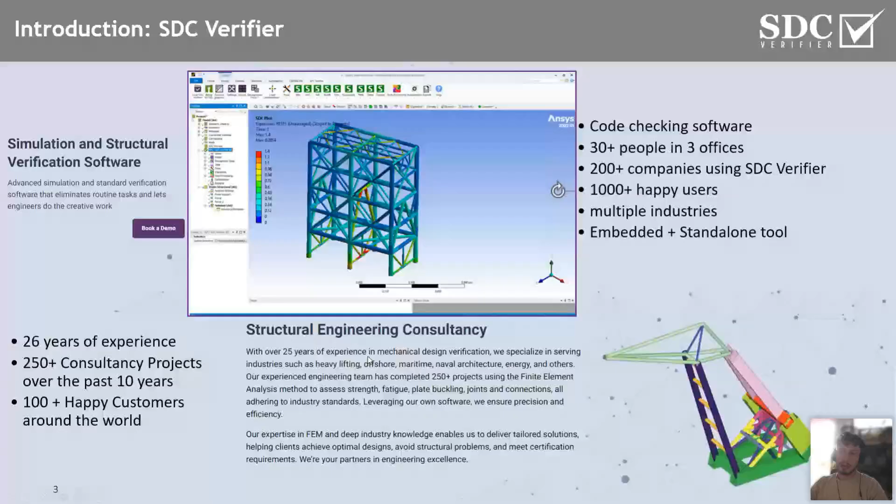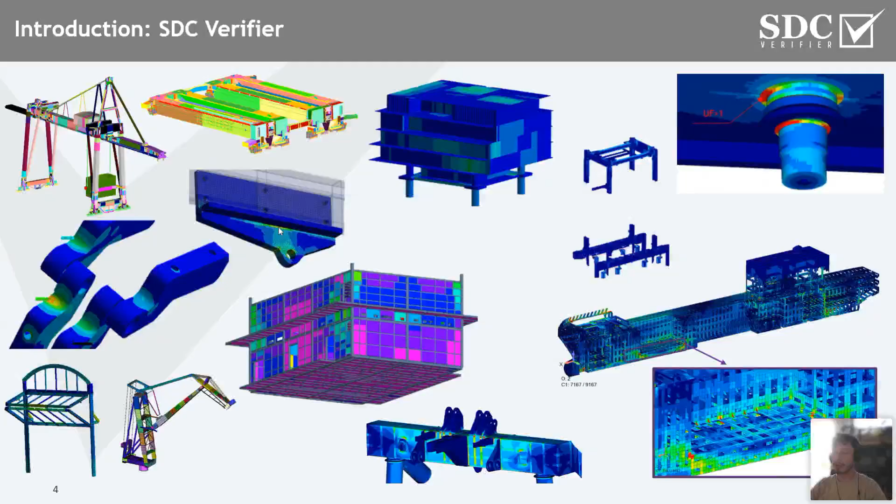Here on the screen you can see different structures for which you can utilize SDC Verifier. As you can see, many lifting crane structures, shipbuilding, some smaller structures where fatigue assessment has to be analyzed, and different types of offshore structures, topside, mud mats, from global analysis through very small details where you have to comply with standards. You have to ensure that your part will meet the certification requirements, and you can use SDC for this.

From our experience and the trends we see at the moment during our work with different companies from different countries, we can see that FEA tools are getting more and more popular within the industry. At the moment, basically, there is no way to ensure your structure meets the standards, to calculate structural strength, fatigue, weld strength, and plate buckling without FEA tools. We always have to meet very short deadlines and very strict rules where results have to be accurate. So at the moment, the only way to do that is to use FEA tools, such as Ansys with SDC.

We can see that a lot of companies try to automate all the code checking. It's not like it used to be, with spreadsheets and manual work, where every time you have to repeat the process, or regenerate reports, doing the same work each time. So we can see that a lot of companies want to reduce this time through automation. If you have very repetitive processes or very similar structures where you can repeat those processes easily, automate them - that's the way to aim at the moment to fit deadlines and ensure your structure is always checked the same way, so there is no room for error.

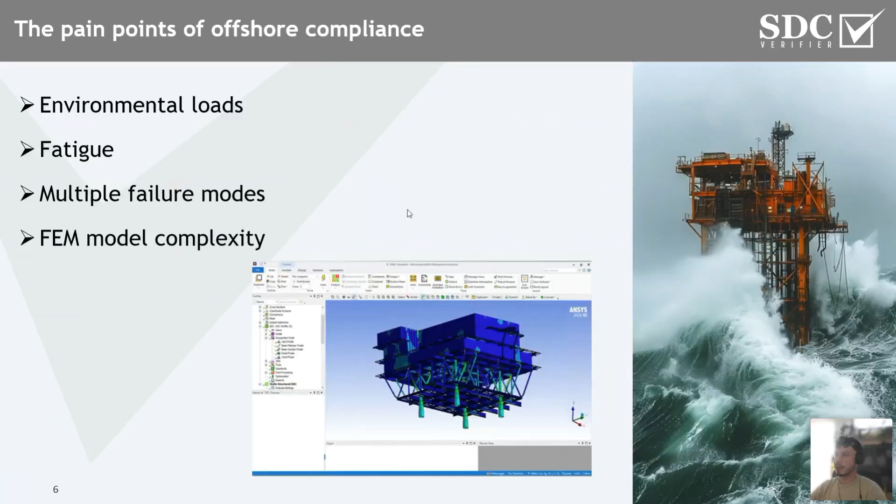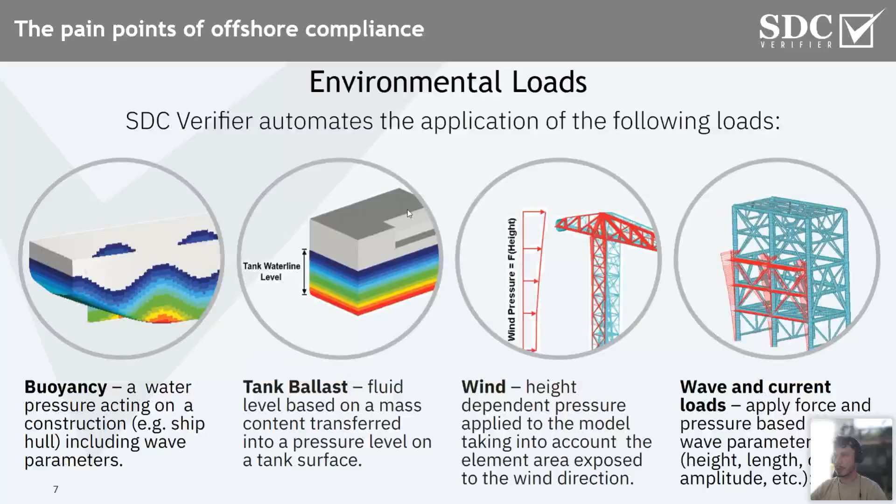First of all, all the complex loading conditions should be taken into account, as I said - different conditions like wind, weight, wave load, tank ballast, buoyancy load, and so on. We have to make sure we can apply them directly through the model, for example with the use of different tools, because doing it by hand can be very tedious and time-consuming work.

Also, as I mentioned before, fatigue and buckling. Fatigue is damage of the structure caused by repetitive cyclic loading - different accelerations, cyclic wave load, and so on. This causes stress differences, delta stress, in our elements, which results in the development of cracks. A crack initiates, and with every further cycle of loading, the crack can grow further. That may not even be noticed at first by an engineer or maintenance crew, but over time it can cause a lot of issues, as those cracks often initiate in places where we don't have visual access. So the only way to estimate where cracks can occur, for inspection purposes, is actually FEA analysis. From the results we can see where cracks may occur, in which part and element of the model, and then schedule inspections accordingly.

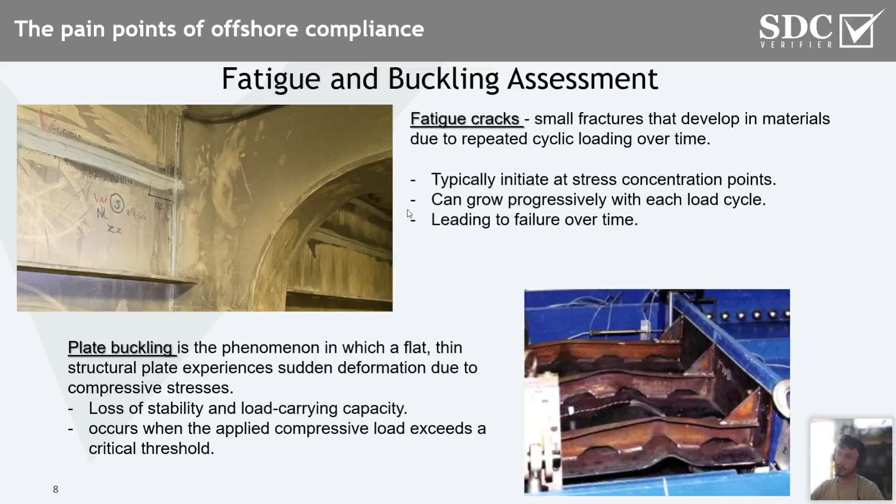We also have limitations of manual verification. What engineers used to do before, and some companies still do, is manual verification with spreadsheets, where there's really high risk of human error. The engineer has to read the results, copy, paste, and manage all those results. There might be thousands or millions of different outputs, different stress results, displacements, and so on. So it's almost impossible to manage all of this without error. Sometimes you update the model and have to re-update all the outputs for the calculation, and there might be cases where you forgot to add something. That's very risky for huge structures. It's also time consuming and really hard to handle multiple combinations.

Another thing is it's also hard to represent the results. We can show numbers, but how do you represent nice plots and nice pictures for your customer, or even for yourself, for internal usage?

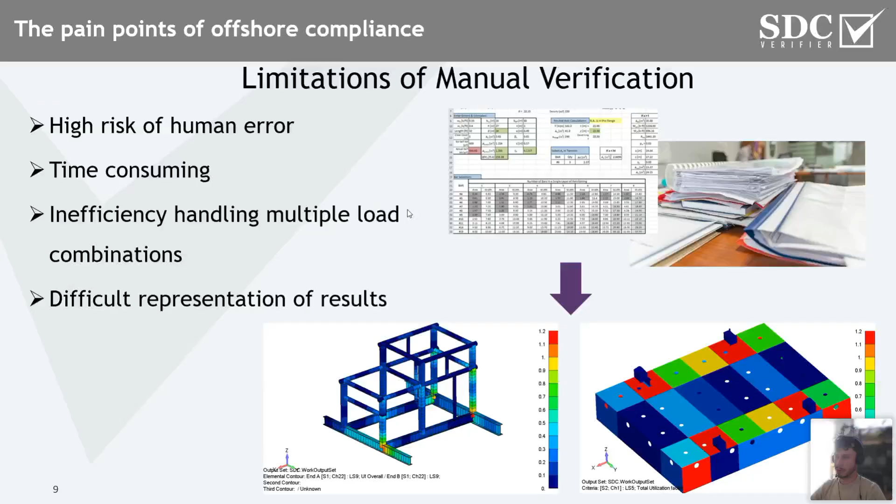Last thing, of course, is compliance to multiple standards. For example, offshore buckling standards like DNV, API standards for tubular members and joints. These are the popular codes to which a lot of structures should be calculated. So the question is how to do it efficiently.

Here we have SDC, which is software developed for engineers, by engineers, to help everyone make their life easier. As you can see on the screen, SDC works as a plugin for Ansys, FEMAP, and Simcenter 3D. Here we will focus on Ansys, but we also have a standalone separate version with our own graphical interface.

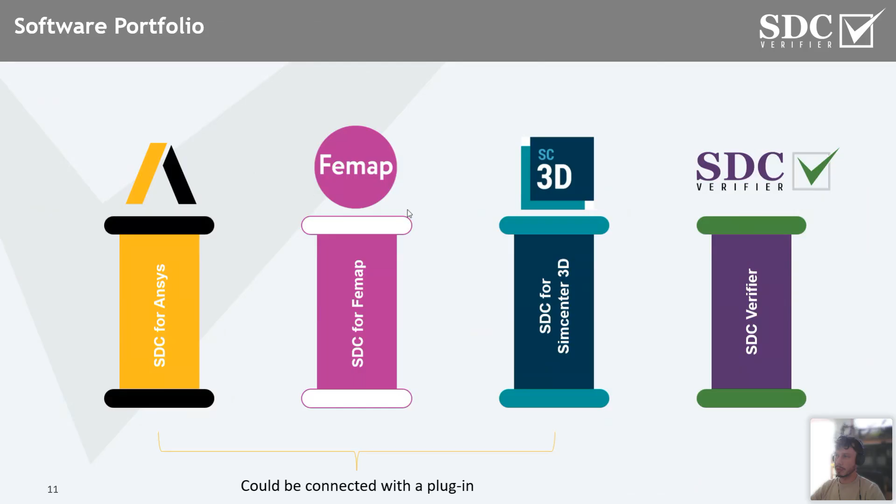First of all, you have to prepare your model. The workflow with SDC for Ansys is that you first create your model in Ansys, apply all the boundary conditions, constraints and loads, and then from there you connect SDC and do all those processes one by one, automating the workflow to improve efficiency and reduce time.

After the model is prepared, the engineer can perform load combinations according to different standards. Every standard has a table with different safety factors and partial reduction factors we have to take into account. Sometimes due to many different loading conditions and directions, the number of combinations may grow to hundreds or even thousands. With SDC, you can manage them easily.

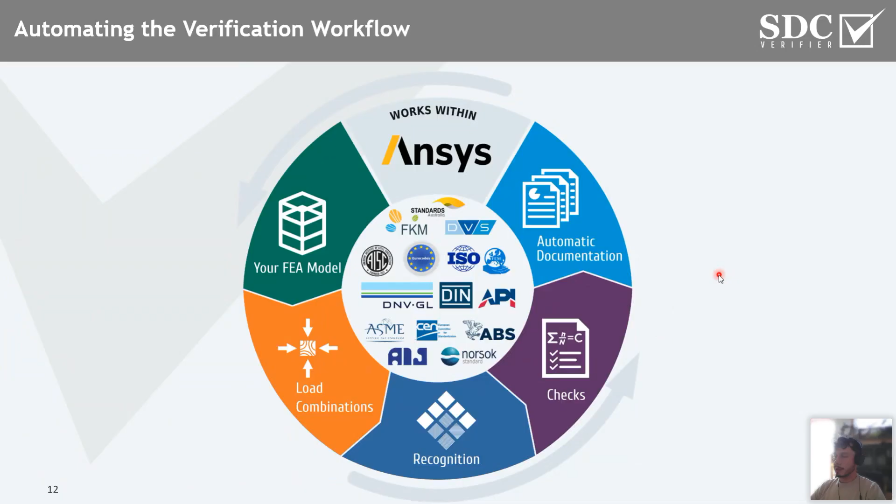Let's go through it in detail. First of all, as I said, preparation of the model—preparation of all the loading conditions and boundary conditions.

With SDC, we have a tool that allows you to create wind pressure with different wind profiles over height and different drag coefficients on your structure automatically. The wind load is exported directly to your Ansys model.

Same with wave load—you can take into account different coefficients for different members and plates, and apply the load directly to your model, again automatically. All those loads will be structuralized with SDC, and you can also generate nice tables explaining all the load steps, how the load was applied, and at which place—again, all with one click.

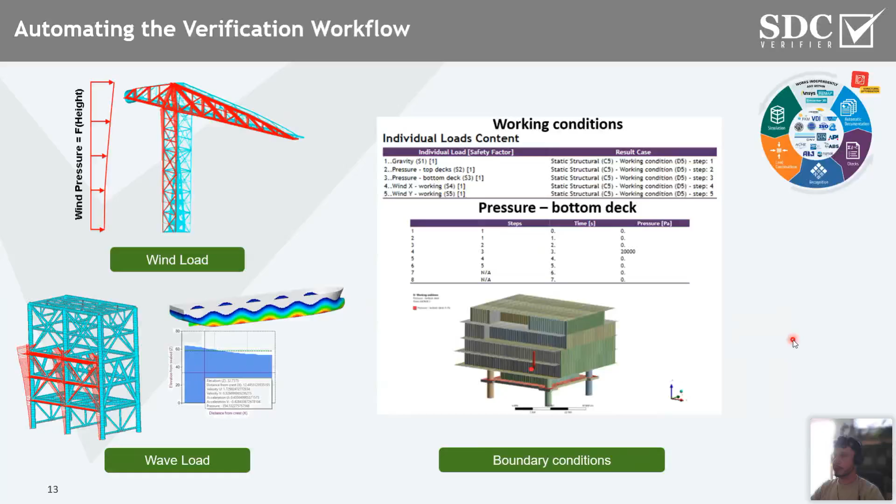The next thing, I have also a short video just to show you how to make the wind load profile. As you can see, there is this simple window.

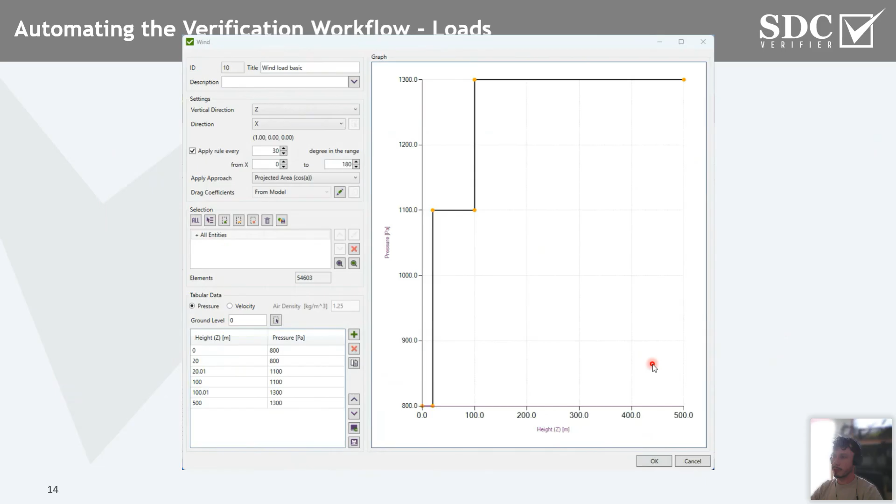Here you can specify the vertical direction of your model, and the direction of the wind applied. On the bottom, you have the possibility to create a selection of the model, so you don't have to apply it for the full model. You can only choose a selection, for example above the water. Choose the wind profile from your database, create your own one, and save it. With use of that, wind will be applied to the model.

The next thing are load combinations, as I mentioned. In SDC, all the loads are structured in a way that you will see separate individual loads, so all the loads without any factors, which can be combined afterwards with linear combination with different factors from standards.

Then we have load sets, which are linear combinations, and also load groups, which are envelopes of the result. A load group can be created out of load sets or out of individual loads, so you can choose which loading conditions should be taken into account for certain standards, or for example for fatigue checks.

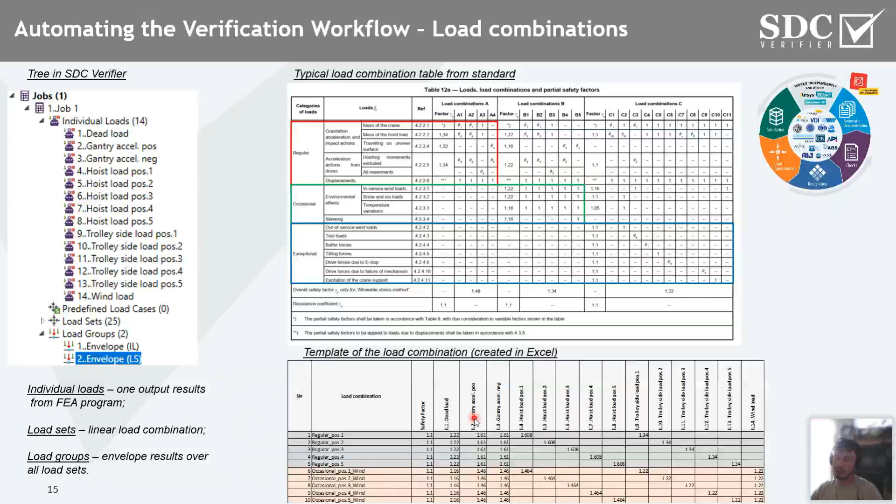What you can see here is a typical table taken from a standard. It can vary, of course, from different standards - different factors, different loading conditions, but the idea is the same. The very basic way to do it, how most engineers did it before, is to create it in Excel and copy paste this table into SDC. That's one thing. Or you can also use predefined load cases, which is a way to do it automatically.

Here you can see a short video of how those automatic combinations can be created. The engineer can select the standard, then the next step is to choose a category for each load - for example gravity, dead load, some vertical forces, live loads, and so on. Of course, you can choose multiple conditions at once.

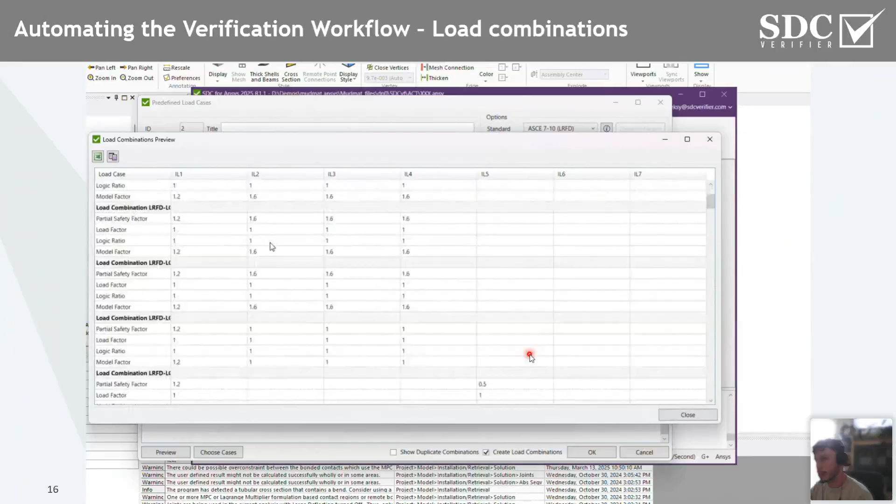You also have the possibility to choose different positions of the load. For example, if you have a wind load from different directions and you don't want to combine them into one load set, you will see that the software automatically takes all the factors and creates the set of combinations according to the standard which you have chosen. So that's also a quick way to do it.

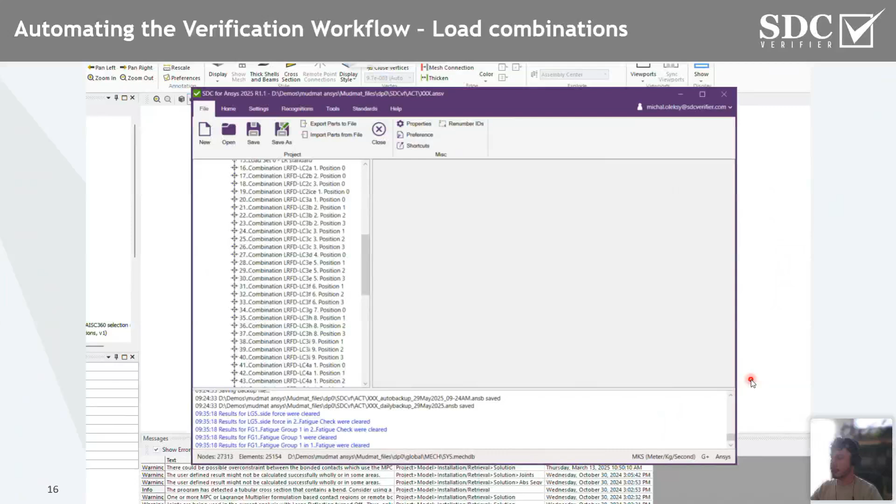Another step is recognition. Here we have different types of recognition. First of all is joint recognition. This one can be performed for one-dimensional elements, and it recognizes all intersections and also reads from the model whether it's a joint in one plane, in a three-dimensional plane, or for example only in one line.

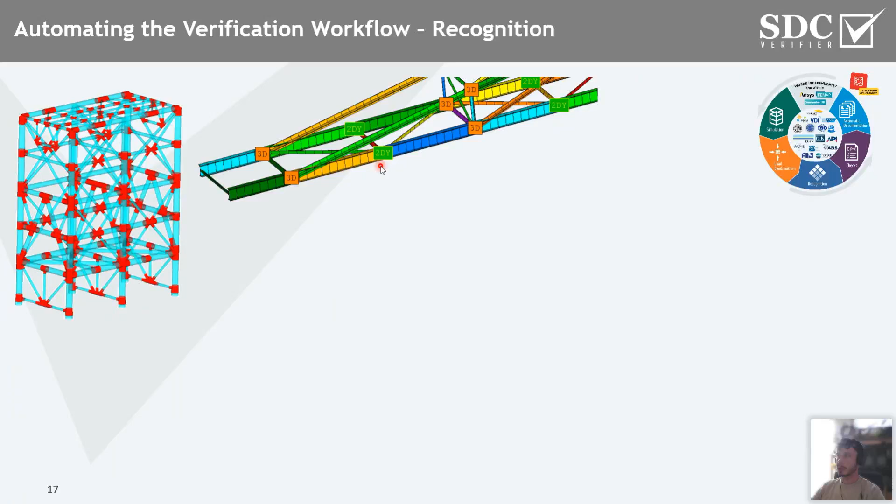Then, if we speak about beam element joints, the next step is to recognize beams. Out of this recognition, the software reads the buckling length for each direction of the beam. For example, in direction Y we have the full length, while in direction Z we will have this length split where we have a joint. That's how SDC works in this case.

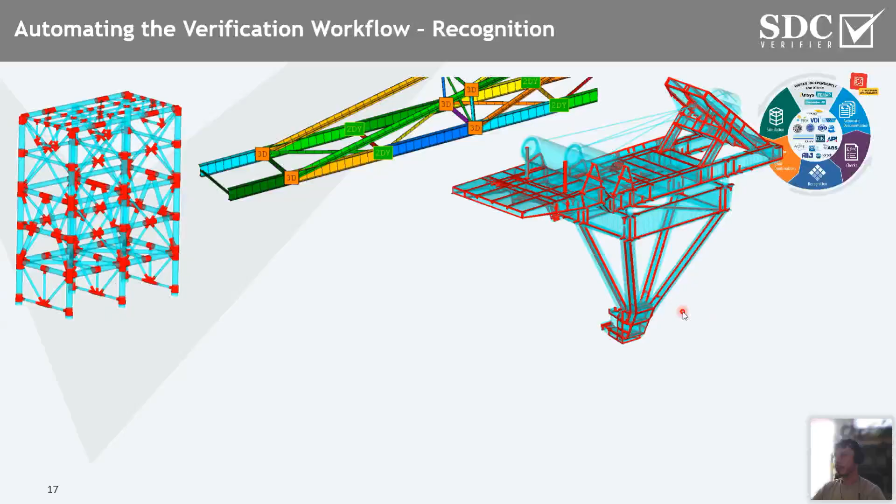Then we have also recognition of welds, which can be used for example for weld strength check and for fatigue checks. Here we can recognize both shell elements welds from the shell model, and also a three-dimensional model.

So with solid mesh, another thing is recognition of stiffeners and of plates. Here we take into account all shell elements. In case of plates, SDC reads the boundary of each plate, reads the intersection between the plates, and also stiffeners, which are modeled with 1D elements. Out of this recognition, we can use dimensions.

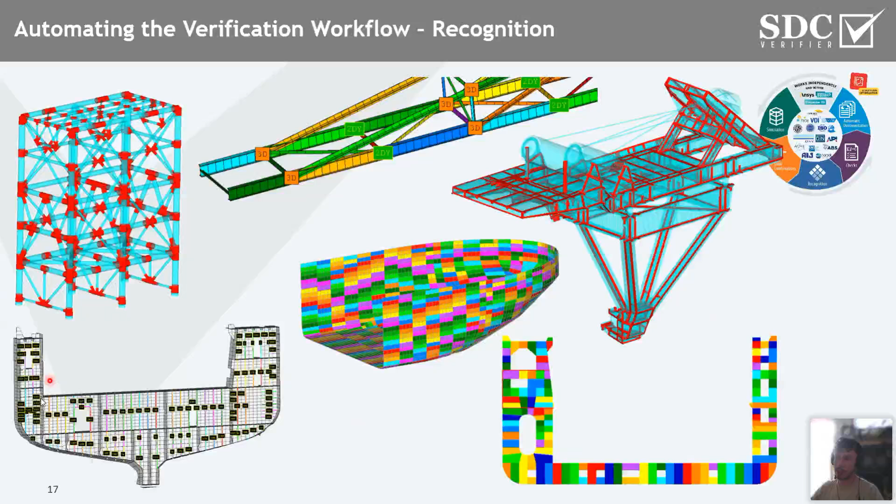SDC will use it automatically. You don't have to do anything except press one button, but that's how it looks like. Here you can also see the recognize stiffeners function, which covers stiffeners modeled with 1D elements.

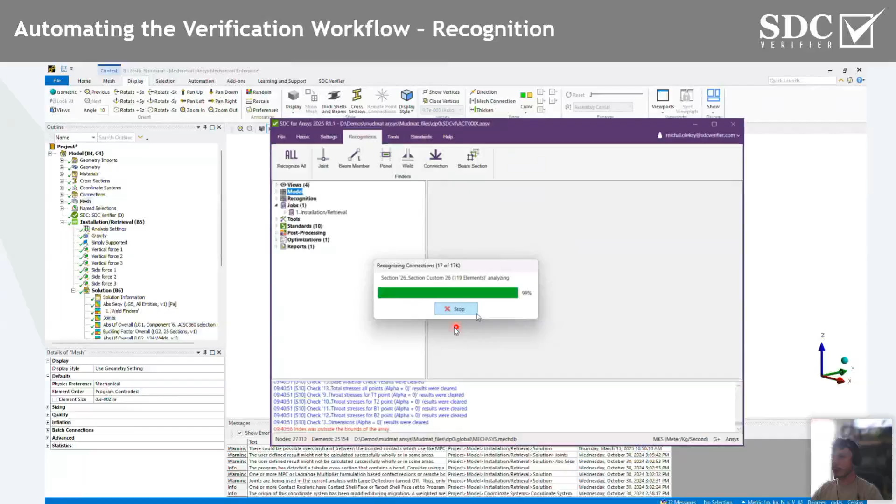Here you can see how to recognize all elements. You can click one button, see the progress and how fast it is, and you will see the window showing how many joints, beams, and plates were recognized. Each recognition will create a table with numbers for every part, and the engineer has the possibility to preview all of them with different kinds of labels, number labels, and different colors directly in Ansys.

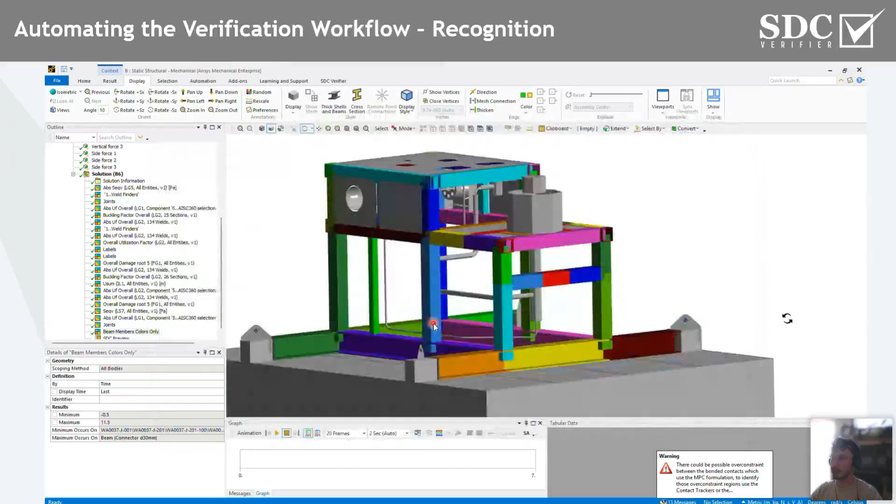That's how you can easily manage all those recognized parts, figure out where you have which member, and then use this logic also for calculation, just to choose the proper selection for the model which you would like to analyze.

Here you can also see panel recognition. We can preview all the plate elements directly in the model. As I said, these elements are recognized out of the shell model.

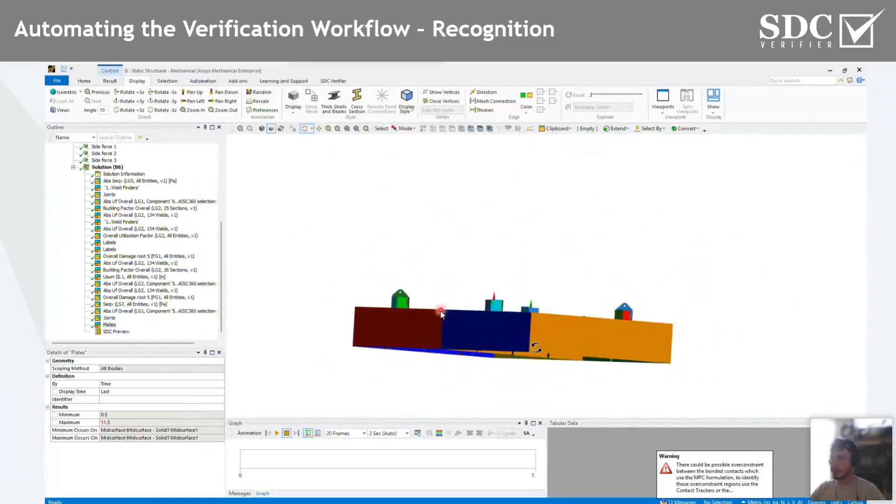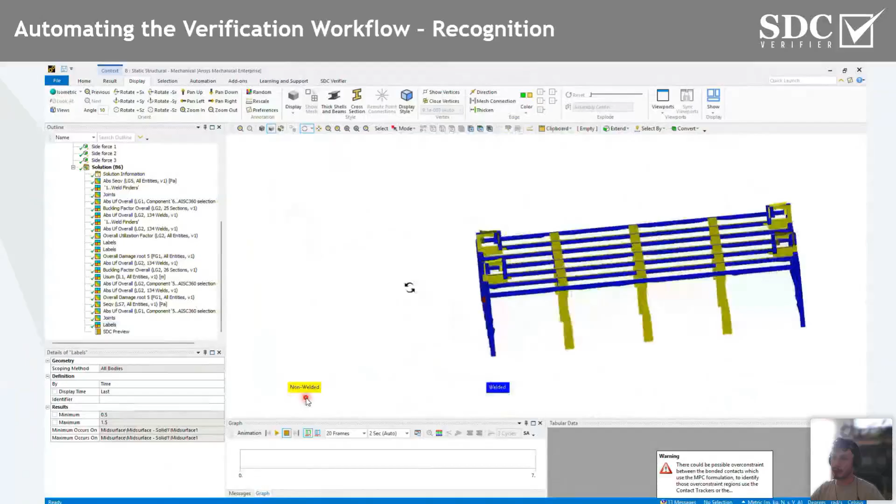The next step would be to show weld recognition. In this case, all welded parts between the shell elements. As you can see, SDC also recognizes which part is welded and which part is non-welded. That's very important, for example, when setting up the SN curves, notch classes, and FAT classes.

Depending on the standard, if we would like to perform fatigue checks, here as a summary you can see all the recognized elements out of the same model. As you can see, this tool is also pretty powerful and makes your life easier and much faster.

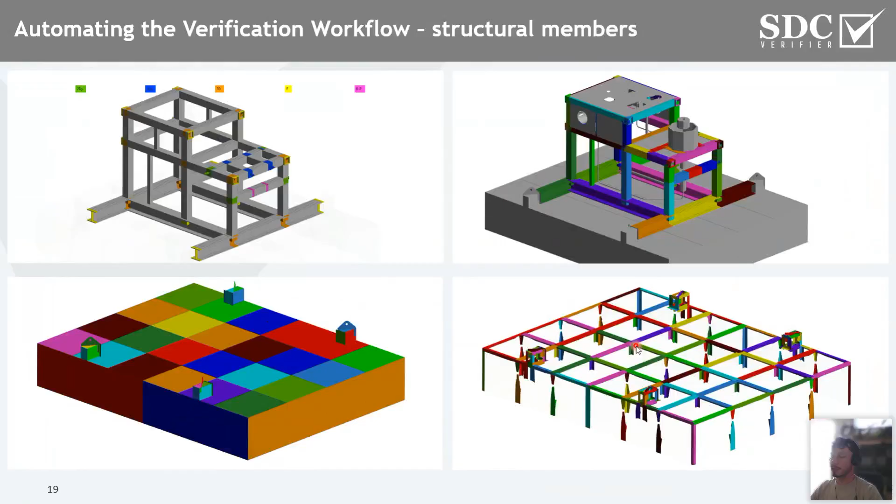If we speak about panel recognition, it's worth mentioning that all the plates are sorted by planes, for example by Z, X, Y, and also custom - these being ones which do not belong to any plane.

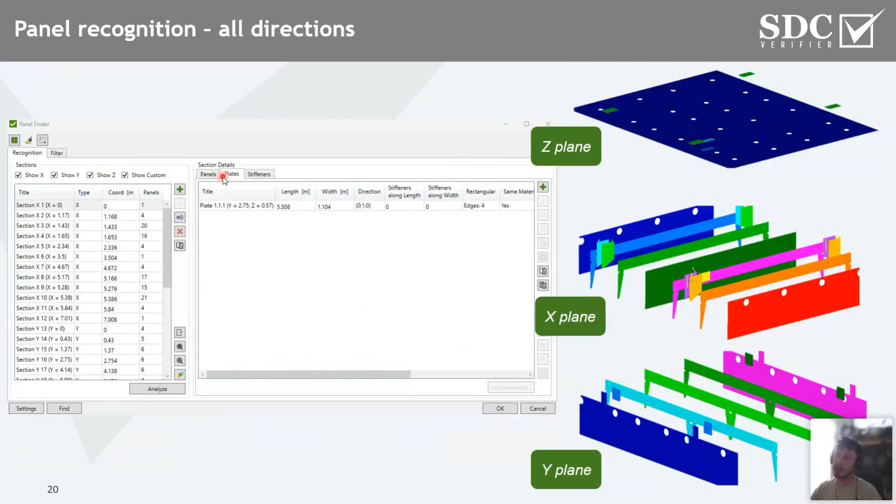In the table, you can manage all the sections. The section is the biggest part, which consists of different panels and plates. The section is then divided into panels at every intersection of panels or plates, and each panel is divided into plates with beam stiffeners.

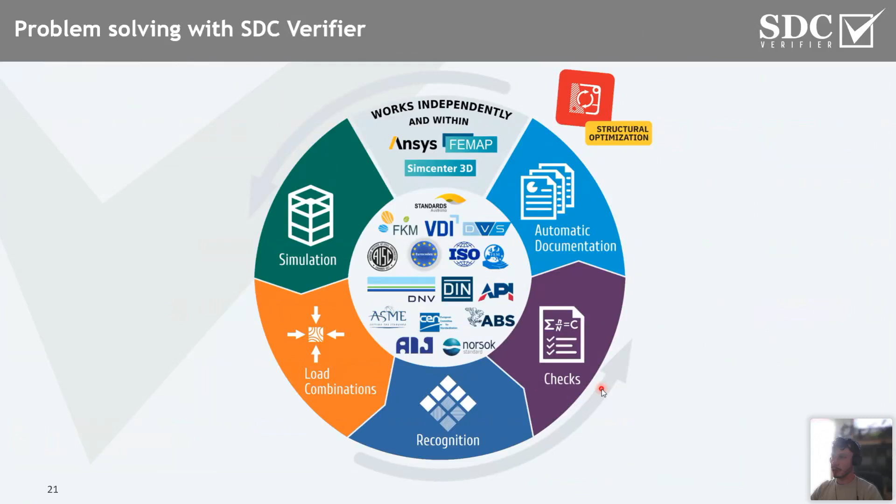The next thing, except recognition, is our checks. In SDC, you have a database of many predefined checks. As you can see on the screen, these are a couple of them. I'm not even sure how many we have at the moment - I think about 50 or 55 different checks with different standards implemented.

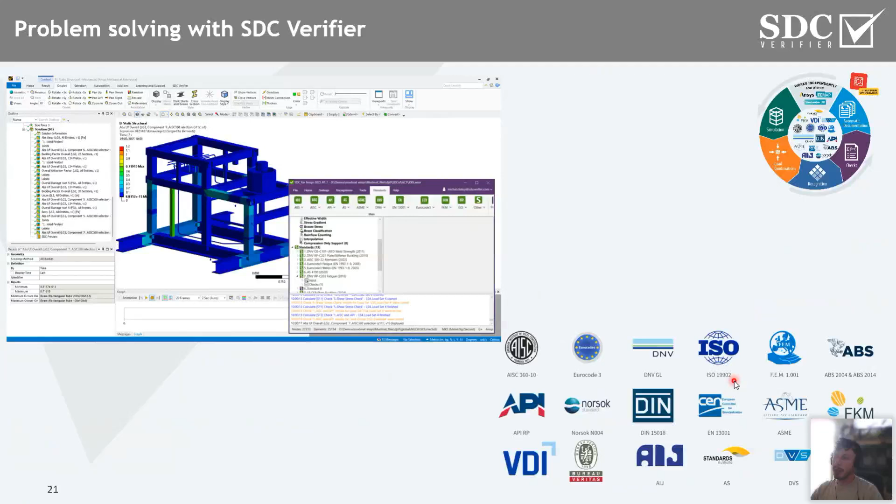That's one way how you can perform them - just select from the database, add it to the project, and then calculate. But there is also another way to do that.

It's worth mentioning that all the checks in SDC are open for the user. So if you wish, if you have some time and would like to learn something new, you can easily add a new check or edit an existing one using simple formulas, using outputs from Ansys - parameters, material data, property data, constants, everything. I know it may look a bit complex at first glance, but in reality it's very easy. If you can use Excel, then you can easily add these formulas in this SDC check creator window.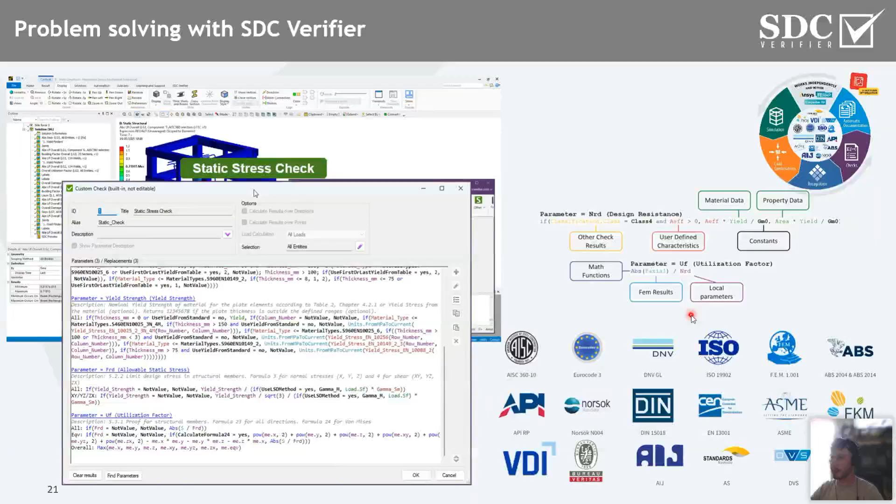Let's now focus on some checks - example for offshore structure. In this case, I would like to focus on plate buckling. Later on we can also discuss fatigue and joint check quickly, just to give you an idea how they work in SDC and how you can make sure that your offshore structure meets the requirements.

For example, if we would like to calculate the plate buckling check according to DNV, when you add it to the project, you will see the window where you can adjust different settings. So it's not like you add the check and just blindly follow what the software told you.

You have the possibility to preview different results, also to adjust some things like thickness factor - for example, if you would like to increase just for calculation your thickness or decrease it to take into account corrosion, that's also possible. You have the possibility to choose different selections for the check and also different methods to read the stresses.

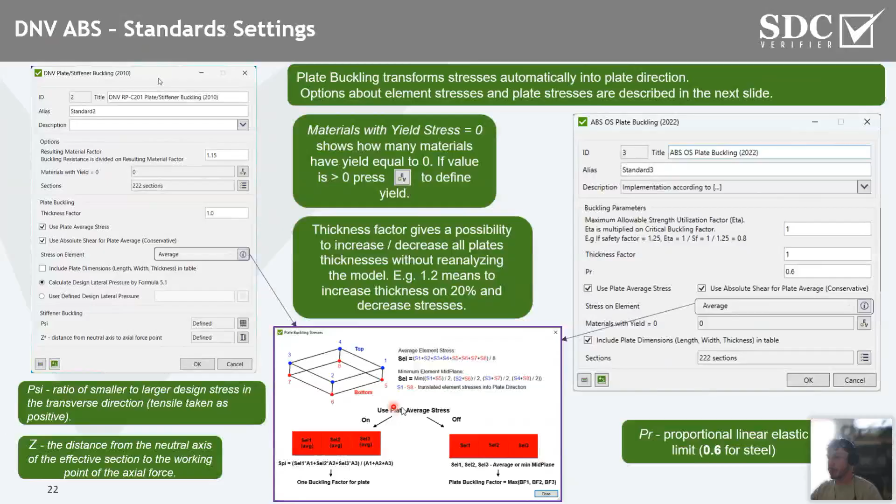The stresses can be shown as average or minimum midplane, for example. It's also a possibility for an engineer to use a different approach. On the left you can see DNV, on the right ABS. In general these checks are very similar - we only have slightly different factors.

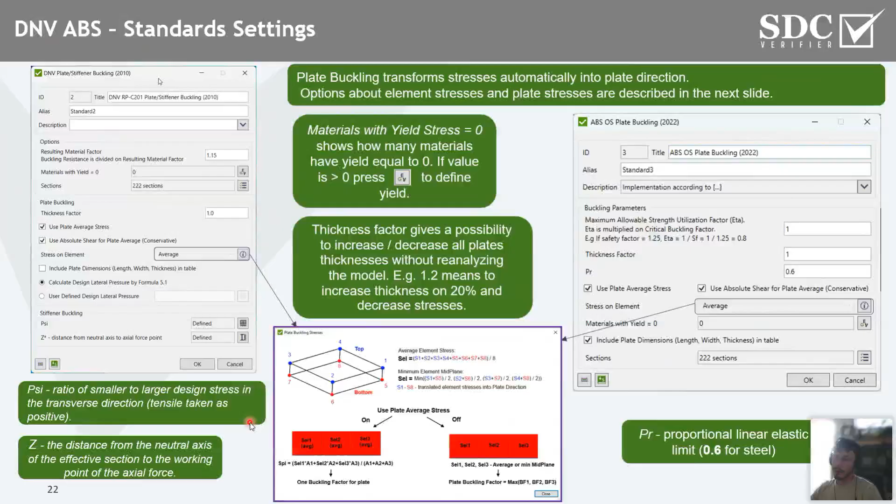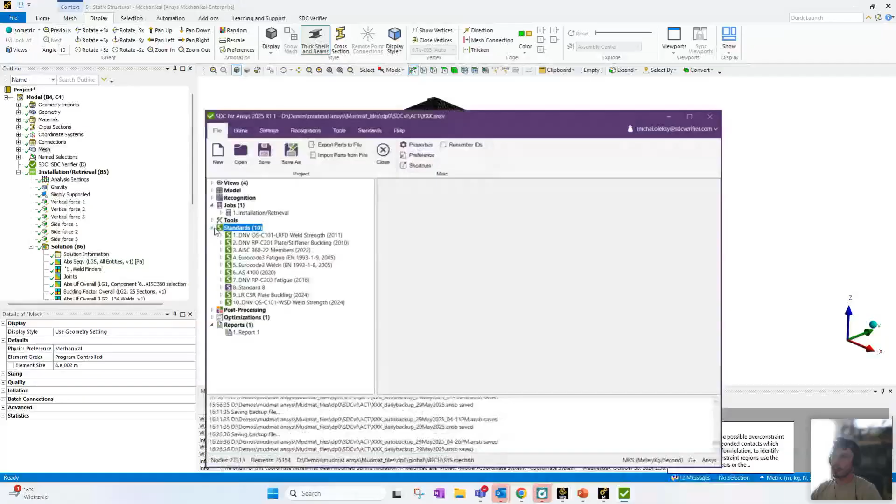Just to give you a rough idea how quickly you can do it with SDC, I will quickly jump to Ansys and show you a live demonstration. We can even see how much time it will take me to recognize and calculate this DNV check, and you can compare it with hand calculation, if any of the engineers still does it.

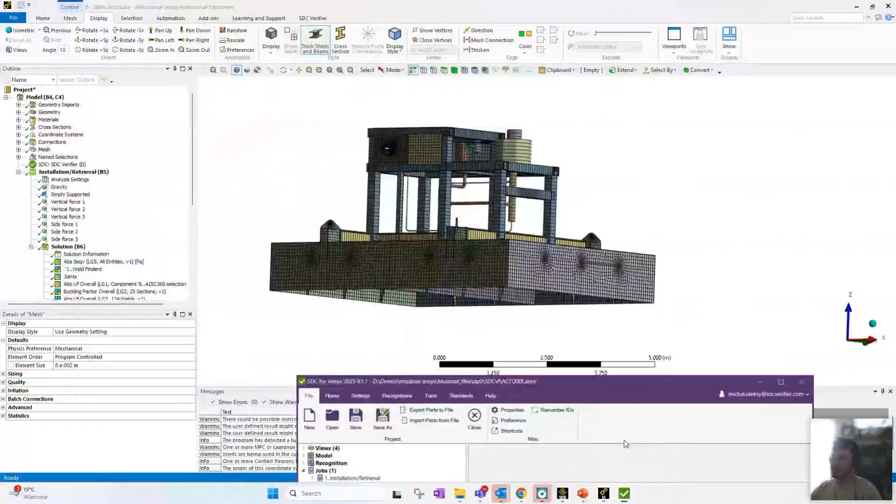First of all, we have our model, same as on the presentation. Then I can go to SDC. First step would be to recognize panels - I can go to the panel finder, click find, remove all the existing sections, and recognize it once again. As you can see, how quick is it?

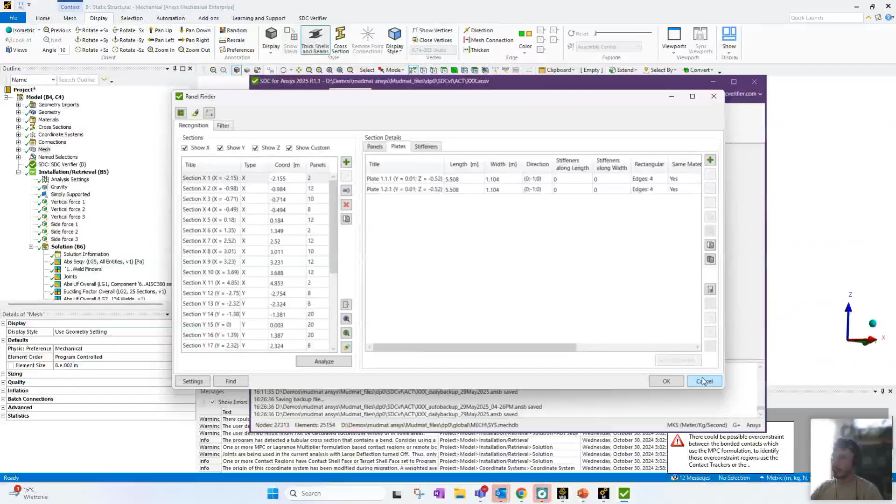This model is not so big, but even for a larger model it should be fairly quick. I approve by OK, and then add the standard which I would like to calculate - let's choose DNV, for example, CG0128 plate buckling.

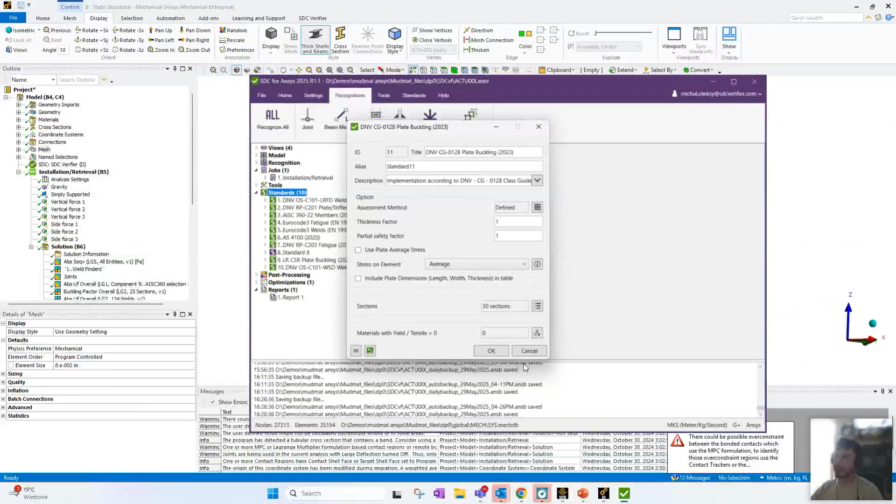Here you can see the same window. If you do it for a second time, you can already predefine all those settings which you usually use. So with one button, you can load them, approve by OK, and you're basically ready to preview results.

So I can quickly create a plot. The only thing you have to do here is choose loading conditions. For example, I would like to see plate buckling results for the envelope of all my load sets, which I created. And here, preview. On the bottom, you will see that SDC started calculation, and it calculates for all load sets, 1, 2, 3, 4.

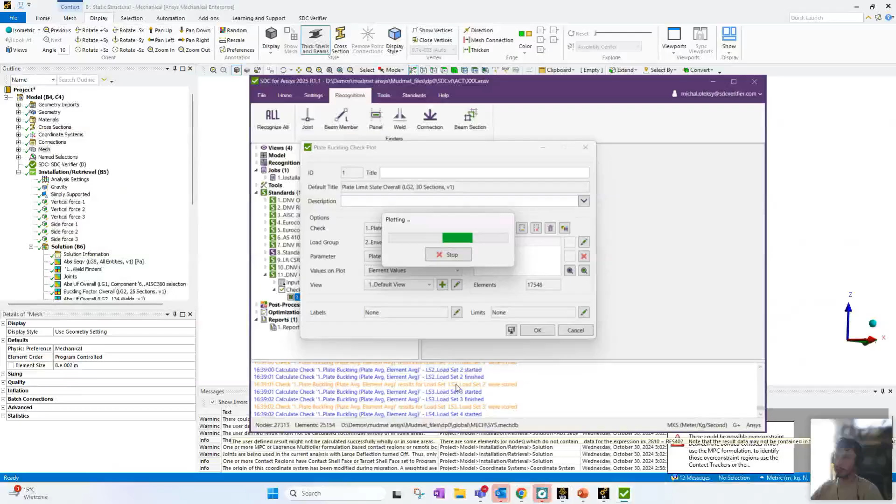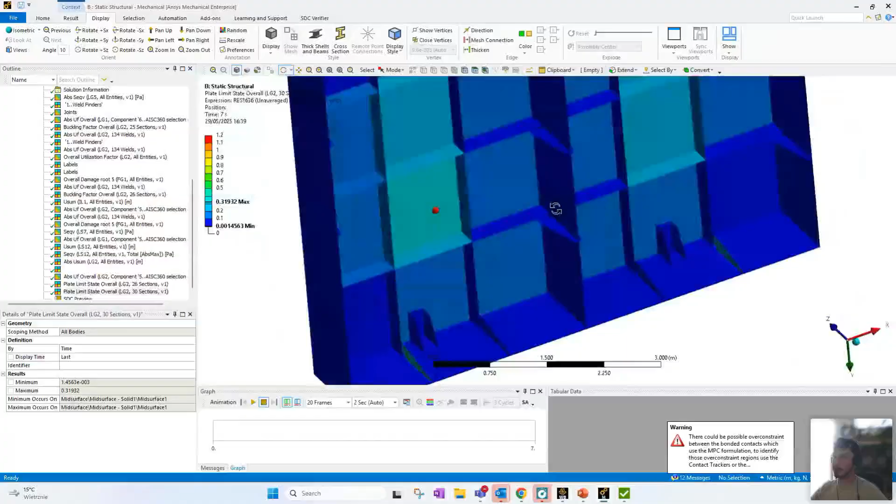Of course, depending on how many load sets you have, it will take longer or shorter. But in my case, it's already done. It took me about 2 minutes to calculate all those plates, probably around 100 plates. For each of them, I already have the utilization factor and all the calculation procedures stored according to DNV.

Also, with one click, I can generate the report and send it to my colleague or even to a Certification Society.

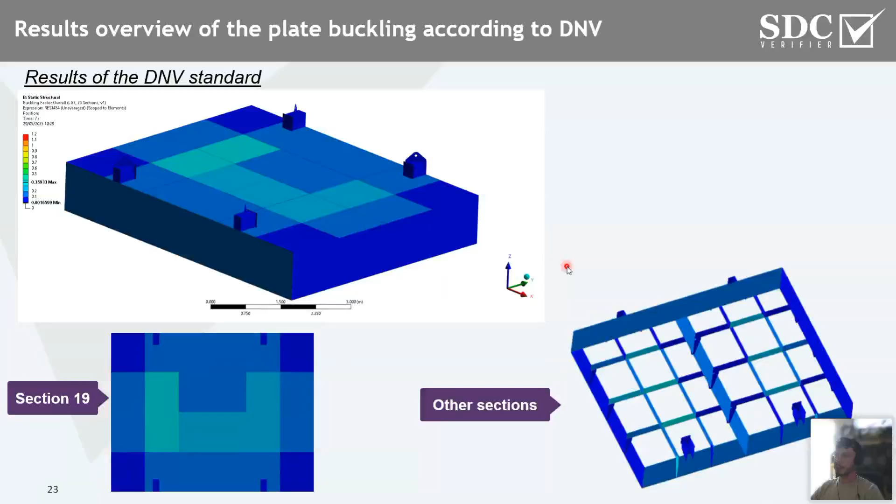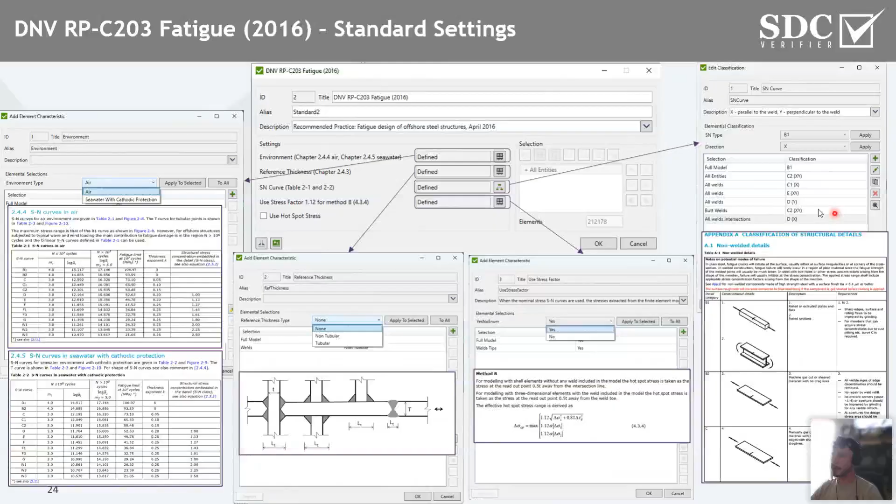If I go to the next slide, you will see that classification for the welds and for non-weld parts may be different. Of course it has to be different for different conditions, different direction of load, different type of welds, and so on. You can find these pictures in different standards, and they result in different classification for our model.

With use of the SDC selector, you can easily recreate that classification directly in SDC. As you can see, for full model I have a higher class, and then for welds in X direction - X direction will always be parallel to the weld. That's how SDC automatically transfers all the stresses in weld direction. X direction is always parallel to the weld, Y is always perpendicular, and so on. Thanks to that, you can easily set it up according to standard.

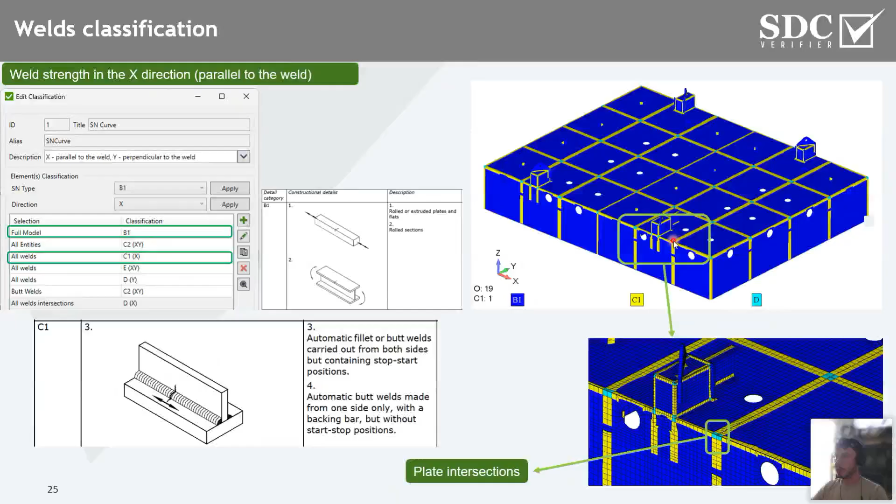For example, if we speak about X direction, you can see that here I set up C1 for welds, B1 for all the model, and also for all intersections, which are also automatically recognized with use of the weld finder. You can see from this plot that it was automatically assigned to all the elements, taking into account all those intersections. Same situation would be for Y direction.

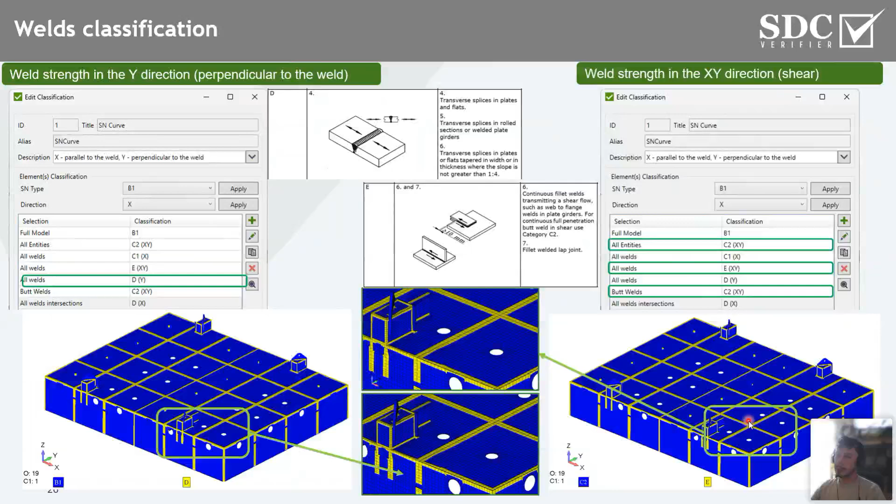Then with use of the selector, you can specify shear values again. For different types of welds, you can also select different options, whether it's butt weld or fillet weld, and so on. In this way, you can build this structure.

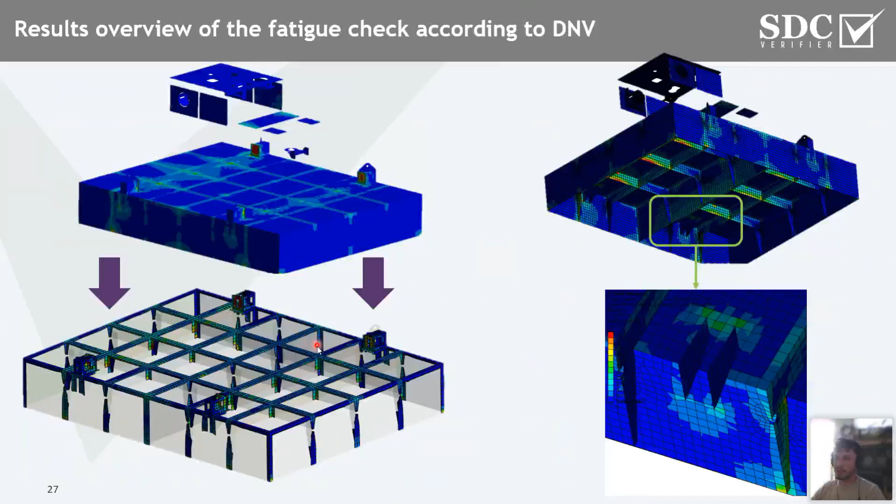Then when we go to the fatigue, you will see the fatigue results here again. According to DNV, you will see that the higher results are, of course, on the welds, because we had lower classes for welds. You can preview the results like this, directly just for the welds, the part which is usually most interesting. You can create many detailed views, and also place them in a report automatically.

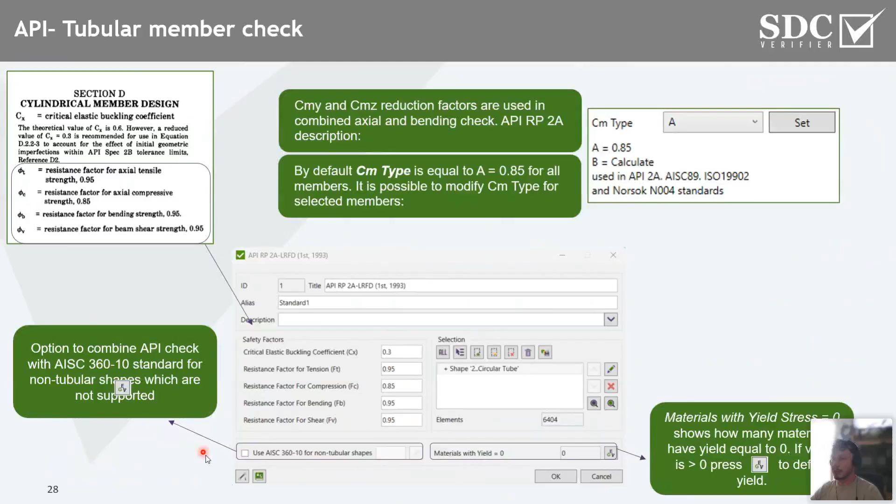One more thing which is often used in offshore structures is API tubular member checks. It can also be performed quickly with use of SDC. You have the possibility to adjust your resistance factors and choose, for example, all the circular tubes which should be analyzed. Additionally, for other members which are not supported with API, you can automatically calculate them according to the AISC check, for example.

Here you can see the results of the tubular member check performed for the beam model. Additionally, on the right-hand side, there's a separate joint check, also done automatically using joint recognition and the API joint check standard.

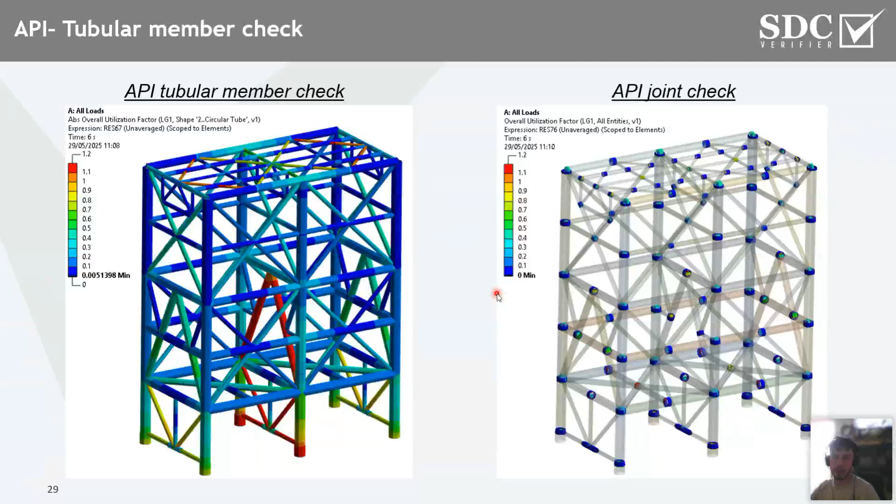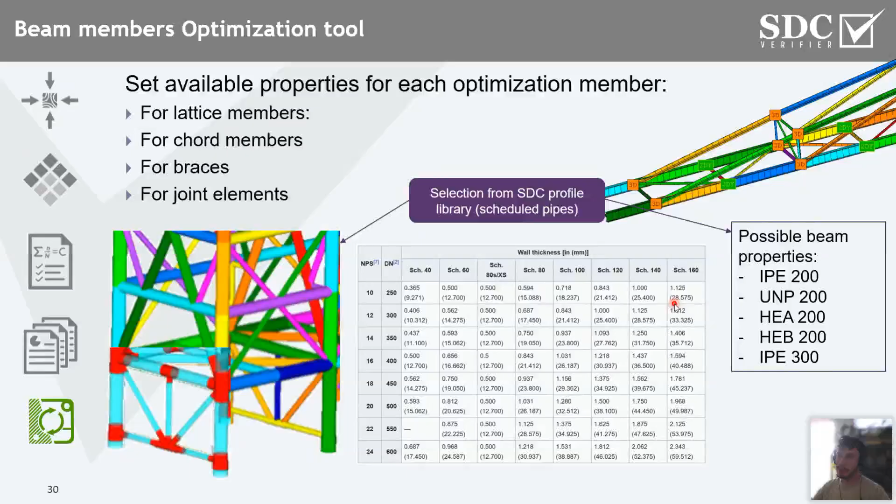Another thing which I mentioned before, where all engineers can pay attention, is optimization of your structure. SDC gives you the possibility to create different rules to optimize structure, for example beam structure according to API, which I mentioned. So you can select possible beam properties, different yield of material, and the software will automatically give you the best fit for a certain part of your model. You can specify a rule to see, for example, the highest possible utilization factor below 1 which meets the criteria.

Same can be done for plates and for stiffeners. If we speak about DNV checks for plate buckling check or stiffener buckling check, you can also optimize your structure with use of different plate thicknesses. The software will suggest which plate thickness you selected is the best fit in terms of your results. So you can optimize the weight of the structure taking into account standard results, and also optimize material type in this way.

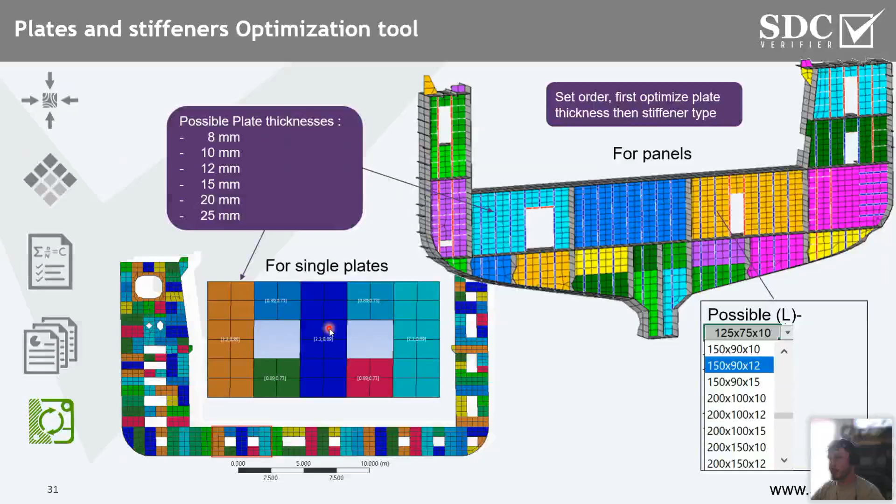Same can be done for welds. The user has the possibility to specify different types of welds for optimization, and then you will see which size of the weld would be the best fit in terms of weld strength.

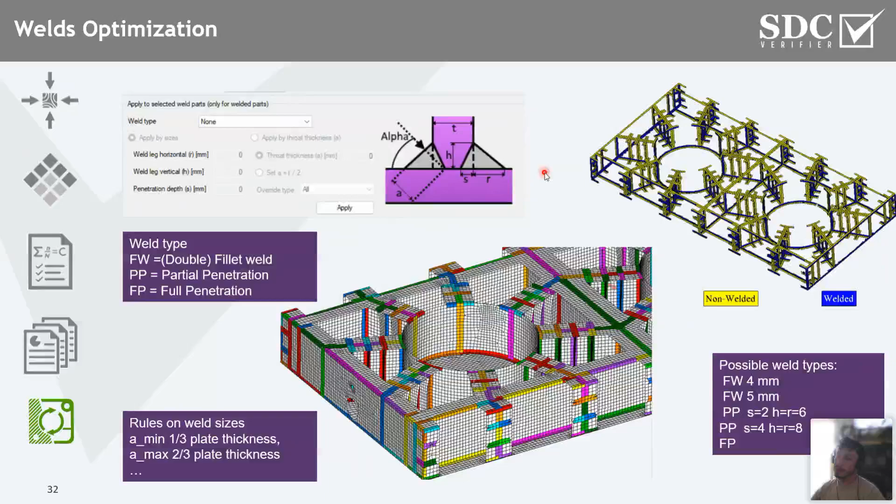At the end, as I mentioned, automatic reporting. You can use a ready-made template, or you can build your own template. Of course you can change your logo, fonts, colors, and so on. All the views can be stored, and you can prepare an explanation about your model, how it was built, with all the sections, with all the plate thicknesses, for example, and of course all the results, which is usually most important during our calculations.

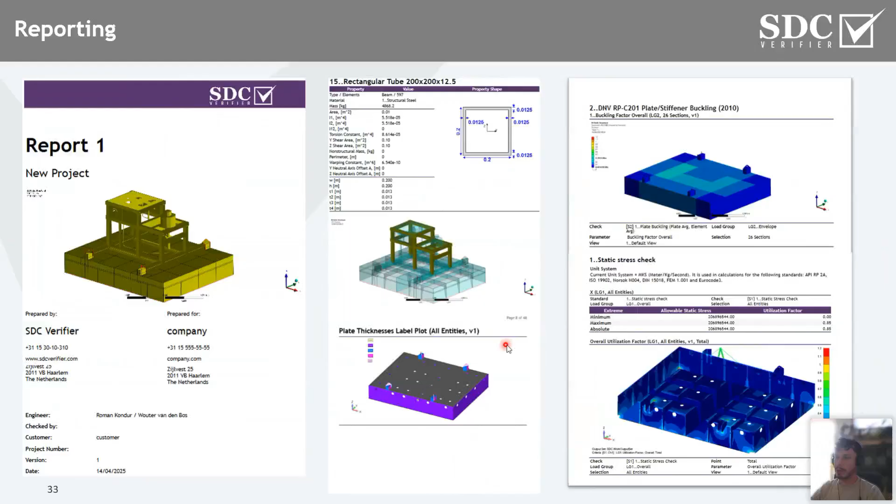A couple of words about feedback from our customers. Here you can see a few graphs showing how much time, based on feedback from users of SDC, you can save compared to, for example, hand calculation. As you can see, it's a significant reduction of time.

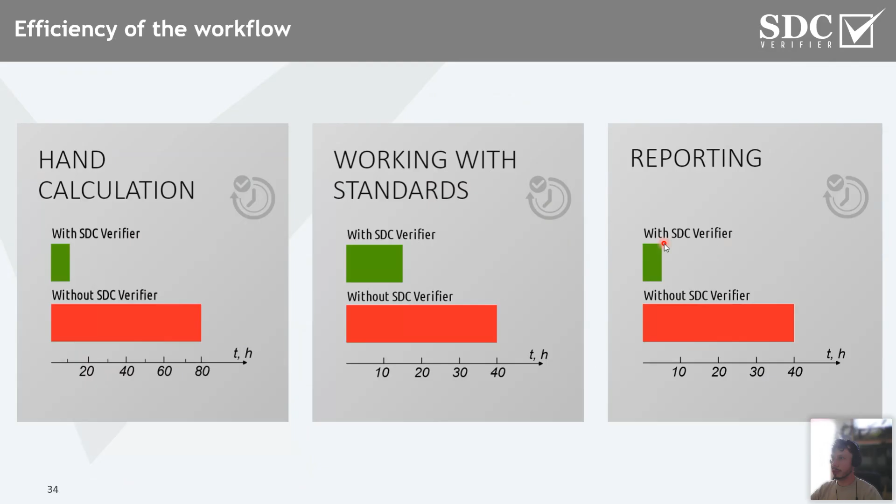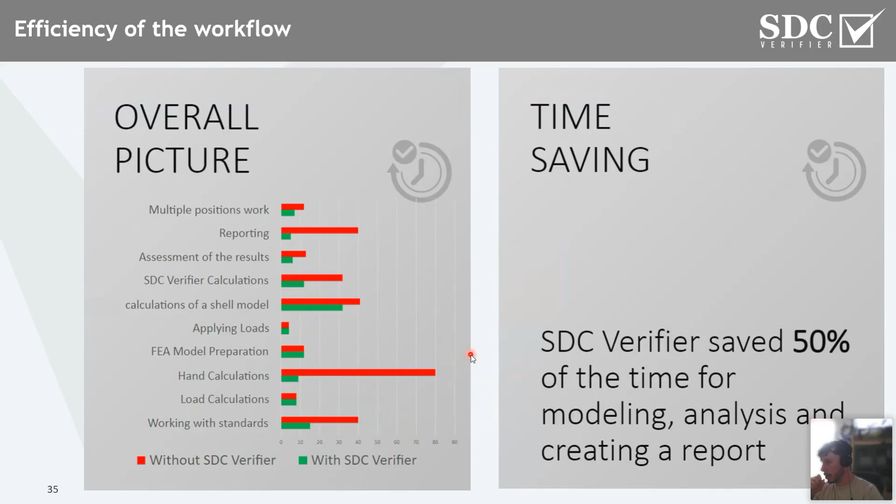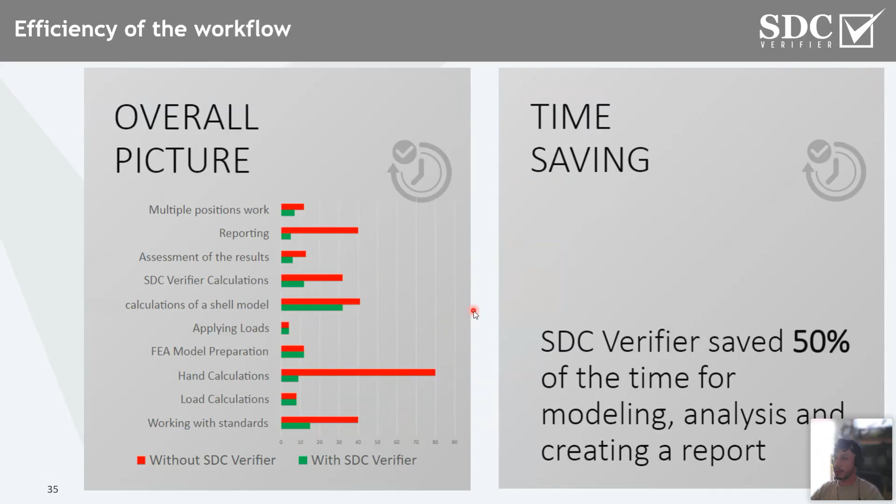Same with automatic code checking and reporting, which in total, taking into account all of this, you can save around 50% of your calculation and project time, which at the end of the day can result in you delivering your product quickly, and also without errors, which I mentioned for hand calculations.

To summarize, SDC Verifier is an all-in-one software solution, whether it's a plugin for Ansys, which we were focusing on today, a plugin for any other software, or even a standalone version with its own interface. It gives you the possibility for structural design automation, reduction of time, and reduced human error, because the results are always up to date with your FEM model, along with standard verification. So there's no need anymore for tedious work with Excel spreadsheets where you have to always remember to choose the correct factor or correct conditions from the standards. You have everything in one place, and together with reporting, it gives you one tool for the full workflow of your project.